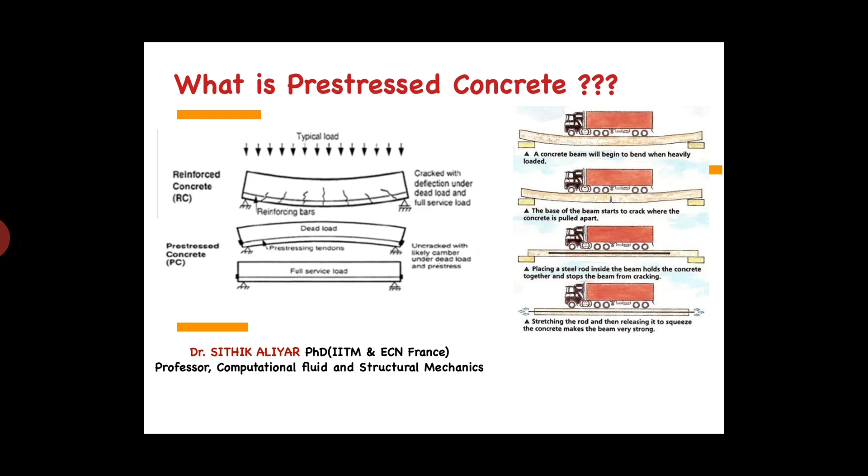When you apply further extra load, then only the beam will start bending, then tension will develop, then the crack will come. This is a new case, understood? It's not like the theory you have studied, totally it will change in pre-stress. You will understand more as you pass through and understand the figure, we will learn more in the coming slides.

This is another explanation. You see the first figure on the right side, like the same RCC beam. When you apply a load, the beam will bend and there will be a tension crack developed at the bottom. Same for the cantilever beam, I have shown for both, sagging and hogging, same story. When there is tension, the crack will develop when your load is exceeding.

But in pre-stress, the second figure, we are going to stress the beam from the side so that the beam will deflect in the upward direction, and when you apply the load, the beam will become straight. You see there is a deflection in the second figure, the beam is slightly bent. Up to how much you can make the beam bend, the deflection should not be greater than span by 300, it should be less than that. So this is the definition.

As I already told you, pre-stress concrete is the same concrete, but here we are applying initial compression. We will be compressing it from the side, so that before applying external load, the stress from external load is counteracted in the same way, then during the service load it will become a straight beam. If it is straight, then you apply a further extra load. If there is sudden reason, an earthquake or wind load, extra load coming, then it will bend.

So the capacity is double, triple, 4 times that of the RCC beam. This is one of the biggest advantages, but it is very costly. Steel you will get in common stores, but pre-stressing requires very high technical people to stress it up to 1000 MPa, 1500 MPa. It's very dangerous to do for every residential building. So it is common for bridges, decks, girders, everywhere.

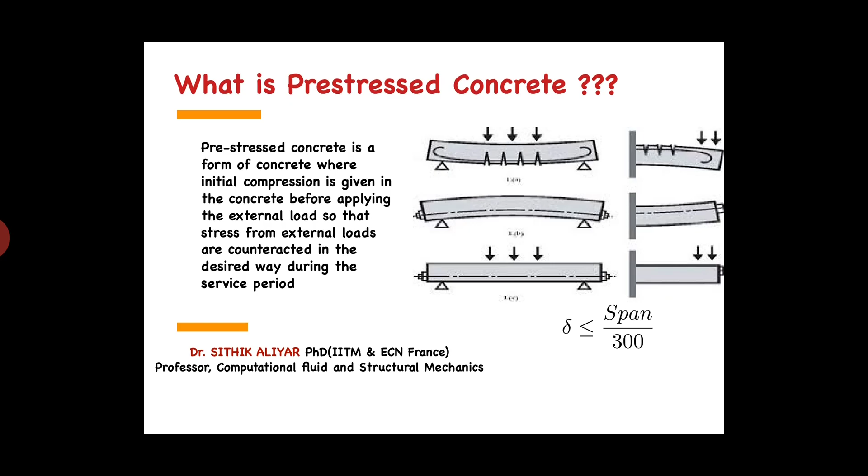So the pre-stressing, I have told the steel in that's the same story. The steel in RCC was playing a passive role. When the load is applied, then the role of steel comes, then if it is under-reinforced, the steel action will come. But here it is an active role, the steel is already under stress. So before even applying the load, the steel is already under stress. That is a big difference between RCC and pre-stress concrete. What are the materials we are using?

If we are pre-tensioning, I will tell you what is pre-tensioning, post-tensioning. It is M40, and we will generally use M30 and M40.

You see the steel MPa, they go up to 2300 MPa, mostly 1000 MPa, 1500 MPa. They will reach up to 2300 MPa. It's a very high number, right? Compared to 250 MPa for mild steel, it is 10 times. So you understood the load, right? 2000 MPa means it's a very big number, that much load it can take.

And you see the steel wire diameter. So far we have discussed 8 mm, 10 mm, 12 mm bars. Here the diameter of the steel wire will be 2 mm to 5 mm. Then a single wire will be formed as a strand or tendon, combining everything we will use. One wire can't take this much load, obviously, it will cut. So you need 10, 100 wires bundled together to form a tendon strand.

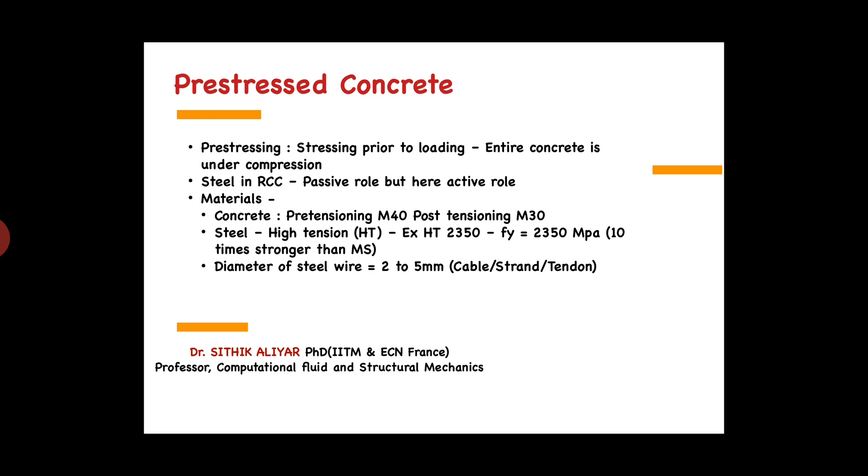Please Google these words so that you will see what is a pre-stressed cable, if you didn't understand.

So I told you there are two ways of making a pre-stressed concrete. One is pre-tensioning, another way is post-tensioning.

What is pre-tensioning? We will tension the steel before, okay, before itself we will tension. Tension means the same wire, same mild steel which is having 250 MPa, I will pull it up to a stress value of very high value. Like if I want 1000, I will stress up to 1000, 1200, so that with the loss I will at least get 1000.

So for pre-tensioning, you see the figure, I am pulling it, then I will cast the concrete, then I will leave it, then I will cut, so that the sudden release will make the concrete beam bend. This is the pre-tensioning method, and then the pre-stressed beam is formed.

Post-tensioning: everything is casted with the duct. There will be a duct and everything is casted. Duct is a pipe, small pipe, like a PVC pipe in your home, it will be a small duct. Then we will apply steel inside, then we will do the tensioning, post-tensioning. After the concrete is casted, we will do the tensioning, then you will have this. So these are the two different procedures, pre-tensioning and post-tensioning.

Pre-tensioning is mostly used in sleepers. Post-tensioning is used exactly everywhere else, for bridges, buildings, roads, etc., wherever you are using it. And for pre-tensioning we use M40, and for post-tensioning we use M30.

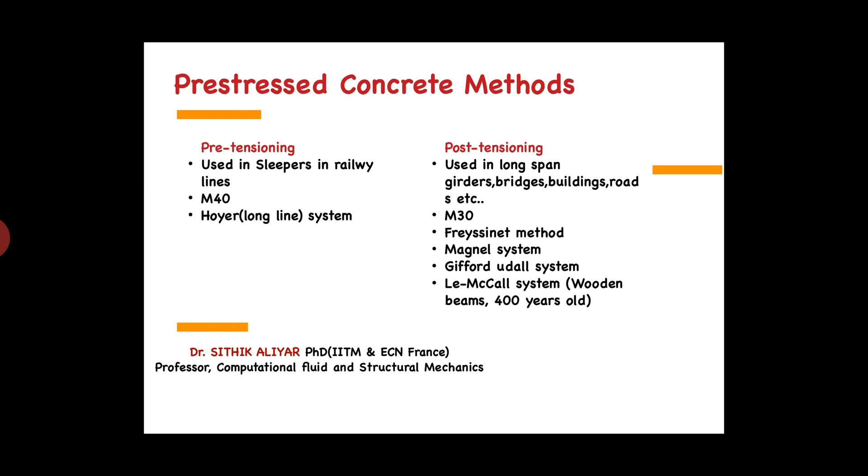So these are the two different methods. I hope by this part you know what is pre-stressed concrete, right? We are going to stress the steel wires up to 1500 MPa, and then we will suddenly release, so the beam will bend in an upward deflection. When the load is applied, it will become straight. That's it, I hope up to this you know.

When I am applying the load, you come to this figure, you see this figure on the left side. You see the third figure from the top. The last figure, cutting of the tendon, you see there is a compression acting after cutting, right? After cutting, you understood the logic: I casted it, I cut the bar, so the bar will act as a compression.

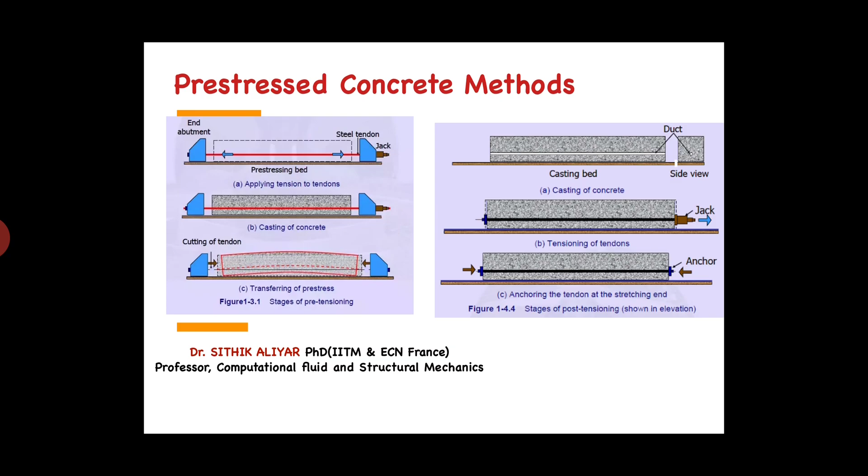Obviously, P into E will create a bending. It's like somebody, you are standing, somebody is putting high compressive force at your leg, at knee location, from the back side, obviously you will fall. Because why you are falling? You are rotating because there is a moment. Correct? P into E from your stability location.

But if somebody is pushing you with the same compressive force at your hip location, you just move two steps forward, so you are just sliding. But if somebody is pushing you at your knee location, you will obviously fall down by rotating. So that is the moment it will generate.

P into E is a moment divided by section modulus. I hope you know the formula. M by Z is nothing but bending stress. So P into E is creating compression at the bottom, tension at the top, from the neutral axis.

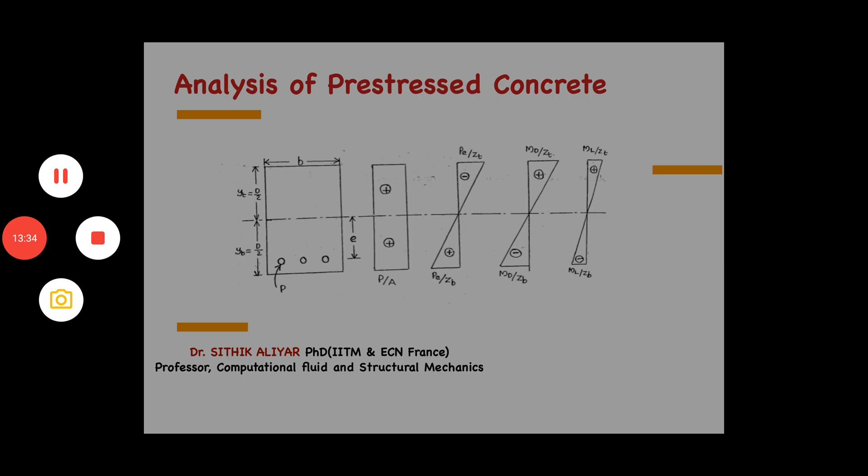Give me a second. So actually it is not Z T by B, it is Z T comma B. Sorry for the formula. See, everywhere it should be Z T comma B. The formula is wrong, it is not Z T by B, it's Z T comma B. Please listen, sorry for this. This is the first formula you are seeing in pre-stress, please note it down correctly. When writing the equation it came out wrong, I hope you understand, I did a mistake, it looked like Z T by B.

So when you are considering only pre-stress, the load because of compression and the bending stress developed because of that pre-stress, there are only two formulas, PE by Z. You can consider it simply as Z, there is no T comma B needed. So forget that, if it is a rectangle it is BD square by 6 anyhow.

So if it is because of the initial condition, only due to pre-stress, they are considering the first two figures. Only for transfer or initial conditions, the first three figures, M by Z, because of everything. Then after servicing, consider you made a pre-stressed beam and you want to know the capacity of the beam after 3 years. So you should include everything, right? Even live load, and then there will be losses, right?

So when you are pre-stressing, you are expecting 1000, but you won't get 1000 because of so many reasons - anchorage, shrinkage, so many reasons, you will lose the capacity. So I am putting some efficiency, eta, P by A, eta. I am putting these losses because of pre-stress into the formula: MD by Z, ML by Z. So these are the three cases.

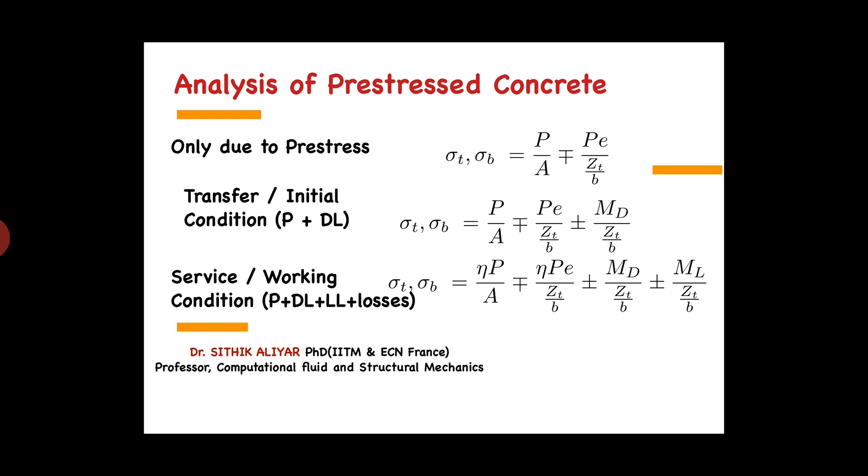Okay, so P is the initial stress, as I told you, eta is the efficiency factor, eta P is the effective pre-stress. I told you there are so many reasons for loss, we cannot expect the same value, so we have the eta value. This is another condition, the transfer condition. Transfer means at initial conditions, the top fiber will be under tension, because as I showed you in the figure, before applying load, that will be under tension.

At service condition, it will behave like a normal RCC beam, which has tension at the bottom, right? So that is the case. At transfer, at initial condition, the top fiber will be under compression and tension. If you understood these two points, you understood the total prestress concrete.

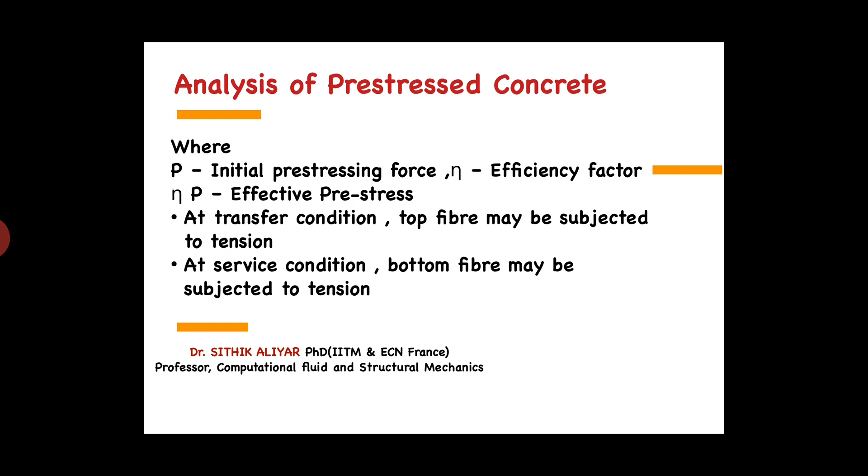So this is another story of prestress concrete. How to calculate the moment of resistance for prestress concrete is nothing but C into L, force into distance. Here the distance is because of two lines. There are two lines in prestress concrete you should know: one is the cable line, C line.

You have to draw a line of the starting point and ending point - that C line is the cable line. P line is the pressure acting line. Compressive force will be very high at the center because of the load applied. So how the parabolic force, or it won't be parabolic, it can be linear also - the force line. The compressive force line is that P line, pressure line, and C line is the cable line.

The distance between them will be considered as the lever arm distance, because what is lever arm distance? It is the distance between where C is acting to where T is acting - that is the lever arm distance, correct? So L will be equal to, here we are considering it as M by P, because M equal to load into distance, P into L. From there they have taken L equal to - lever arm distance will be equal to M by P.

So M is the bending moment acting, and P is how much prestressing force we are applying. In this example I've shown, it is a UDL load, so the bending moment will be WL square by 8. This is how the beam also will bend.

So you have to apply a pressure to counteract the WL square by 8. Correct? How much? How will you know how much prestress to be applied? So you have a beam, they are asking you to apply prestress. How much will you apply - 1800 or something? That number will be calculated based on considering it as a UDL load, and the beam will bend with WL square by 8. Then you will apply that load, then you will have a shape, right?

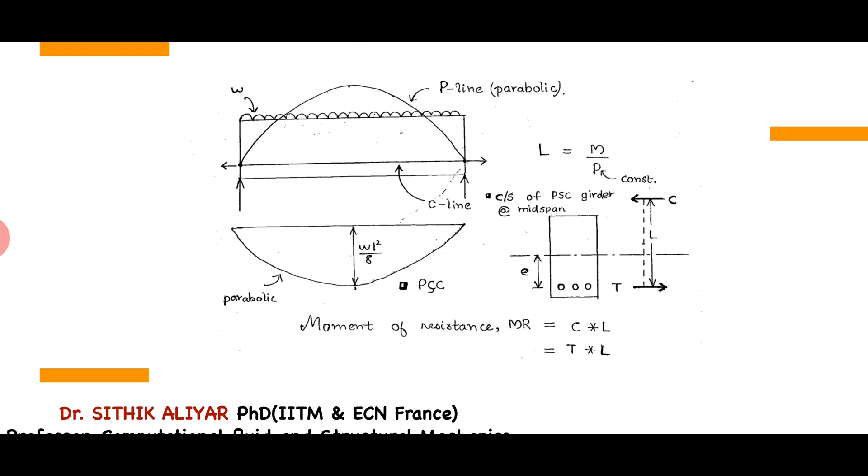I will show with an example. From this slide, you should understand that lever arm distance - they are calculating from force into distance. That concept, lever arm is nothing but M by P.

So the P will be a constant - remember that P is a prestressing force, that force you will apply will be constant. So one more thing I will show before that - an example of how it is being done, where you can keep your prestressing bars.

That prestressing bar should be inside the kern area - kern or kernel area or core area. This core area, you would know how to calculate for different sections. If it is a diamond shape, where it will be; for circular shape, where it will be. So for different shape cross sections, the kernel shape is given in strength of materials - I hope you should know that before.

So if you know that maximum distance, beyond that if you keep the bar, it will develop a tension. So far I hope you know the story - when I am applying prestressing, the total beam is under compression. When the load is applied, it will become normal.

So when you are keeping this prestressing bar beyond the kernel point or beyond the eccentricity, eccentricity will be more, that will develop tension. So there will be a limiting cable zone. If somebody is asking for a rectangular beam, this is a formula, d by 6 to d by 6 - below, inside that you should apply a bar, or else there will be tension in the beam.

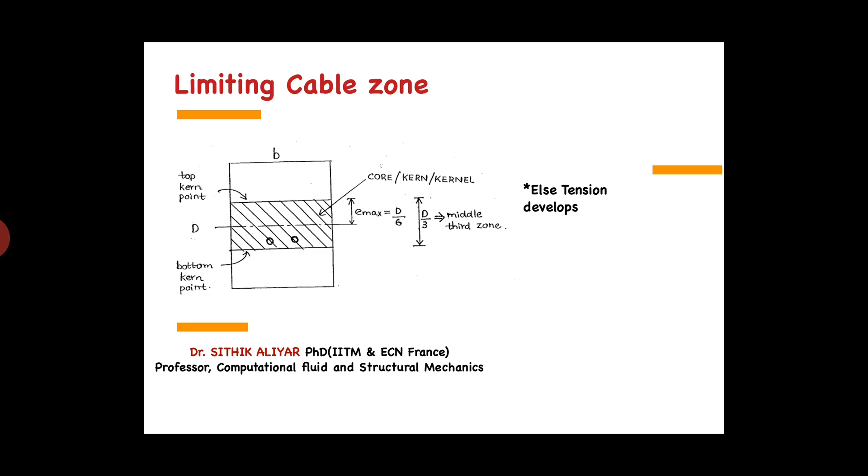There is no rule - you can apply and put reinforcement for the tension, not a problem. But this is the story: limiting cable zone you should put within the core or kernel, so as to have compression throughout the beam.

There are still some topics, but I will give you some examples to understand what we spoke for the last 5 minutes. A prestressed concrete girder, there are 10 meter span.

Okay, they are asking for a girder, meaning a beam, 10 meter span, 300 wide and 500 effective depth, with a straight cable. So the cable is straight, there is no different shape.

Actually we can have different shapes of cable inside the beam. It can be parabolic, linear, or triangular. Here they have given a straight cable with a pre-stressing force of 800 kilonewton, which is approximately 80 tons - a very big number. At 50 from the soffit of the beam, it is subject to a central point load of 500 kilonewton.

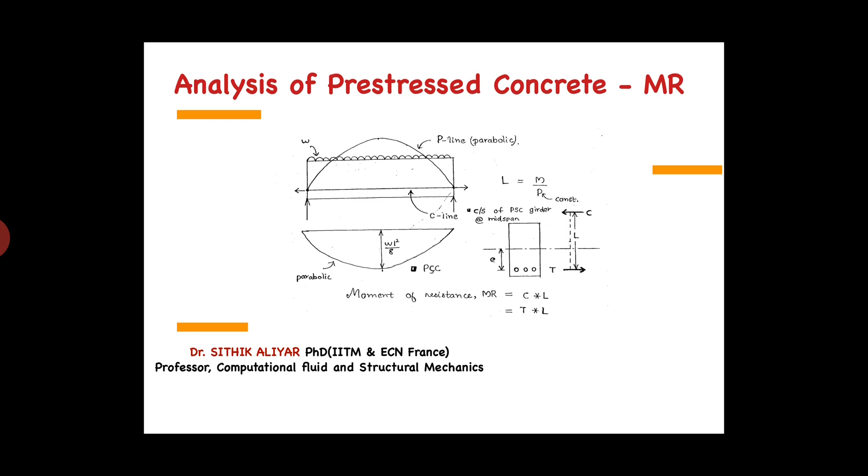They are asking you to locate the P line at the central span and also at the 1 by 4th of the span. That P line I showed you earlier, like this P line - you can see this figure. They are asking for the P line at center of the beam and also at the L by 4 distance of the beam. 1 by 4 of the span is length by 4.

So this is your answer. So they have given load as 500 kilonewton, length 10 meter, width 300, depth 500, pre-stressing force 800 kilonewton, and told you it is a simply supported beam with a point load. We know the bending moment formula, it is WL by 4, correct?

So this will never change, right? Whether RCC, PCC or steel structures, any type of beam, this will be structural analysis. The simply supported beam with point load at center will be WL by 4. So 500 into 10 by 4, which will give you the bending moment of 1250 kilonewton meter. You understood? The moment is very high, right?

If you are smart, you know that in a doubly reinforced section you would have studied to design a moment up to 200, 250, right? It will reach up to 270, 280 in flange beams. We never came across 1000 kilonewton meters - a very, very big number. So only for this we are going for pre-stressed.

So bending moment is 1250. At the center, bending moment is 1250. It is coming, we know the formula. We are going to shift - lever arm distance is nothing but we are going to locate M by P. We know M is 1250, P is 800, divide, you will get 1.56 meter.

So the P line will be at 1560, it is outside the beam. The compressive force is acting at very high value, that much heavy force is acting, 1560, at 1 by 4 of the span. I hope you remember the WL by 4 bending moment diagram for simply supported beam, it's a triangle. So at 1 by 4 of the span, it will be M by 2, right?

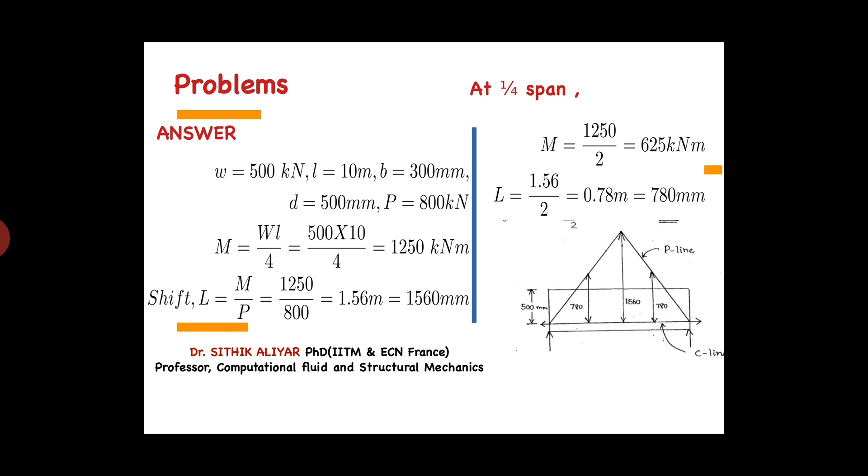By this problem, I hope it is clear. I am able to make sure what is C line and what is P line, how to determine the P line for a beam. If you didn't understand, go through this problem or solve it yourself with UDL load or other cases, so that you know how to draw a P line and C line. So that's this one, and I will tell you one more problem.

There is a pre-stressed concrete simply supported beam, again 6 meter span and rectangular cross section 300 to 600, unit weight of 24 kilonewton meter cube, and the resultant pre-stressing tendon has zero eccentricity at the ends and an eccentricity E at the midspan having a linear profile. Very simple. Under initial condition, the allowable stresses are 20 MPa in compression and 2 MPa in tension.

See, at initial condition, they have given these values. At initial condition means, I told you 3 cases - only pre-stress, then compression and bending because of pre-stress. At initial condition, you should consider compressive stress, bending because of pre-stress, and then you should consider the dead load - that's the second case. So then they are asking how much pre-stressing force you should apply, and the eccentricity at the midspan they are asking. So you see, step 1, you should calculate the section modulus.

So here it is a rectangle, Zt, Zb, no issue, it is like BD square by 6. I hope you know section modulus, it is I by Y, I is BD cube by 12 divided by Y is B by 2, D by 2, so it is BD square by 6, okay, 300 into 600 square by 6.

And they have given, you should calculate the weight, they have given the density, you should calculate the dead load, right? I hope you know you should calculate dead load, then only you will get the dead load bending moment, MD, to solve the problem. So dead load is density into area, multiply, you will get per meter, 4.32 kilonewton per meter.

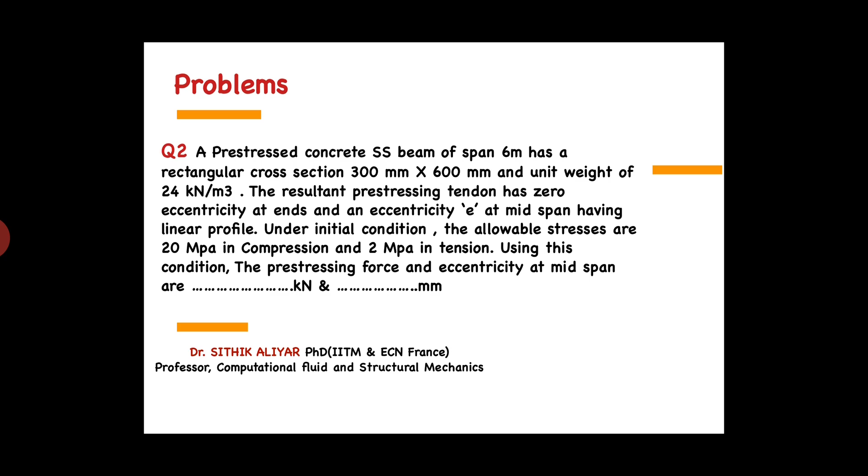So they have given at initial condition it was in tension, so minus 2 MPa. You can see they have given at initial condition 2 MPa is in tension, 20 MPa in compression. So minus 2 MPa for sigma t and 20 MPa for sigma b at bottom.

So you just, if you see, it is algebra equation, right? You just cancel minus P by Z plus P by Z, cancelling each other, MD by Z minus MD by Z, you can cancel each other. So you will get 2P by A equal to 18. So you will get the P value, pre-stressing force.

So you have to apply a pre-stressing force of 1620 kilonewton. Okay. Now you put this in the 20 formula.

20 equal to, because you know P, you know A, you know Z, you know MD, everything. Then you can calculate the eccentricity, where you should put the bars. Solving this will give you the eccentricity of 135 mm.

Okay, see, with this problem you can solve, you can pause and solve the problem. I hope after solving the problem it is clear how to calculate the pre-stressing force. If they have given live load, one more equation will come, that's it. Okay, so this is the same, they will give, change the numbers, change this one. This is how you should calculate how much pre-stressing force to be applied and where you should keep your bars.

Okay, eccentricity. So this is very important. Okay, please try to solve. And I expect the problems, they can ask more problems only related to these stresses. Okay, P by A minus P by Z, only the same story. It will be very easy. You try to solve in textbooks if you have more and more problems, but they will only change the numbers here.

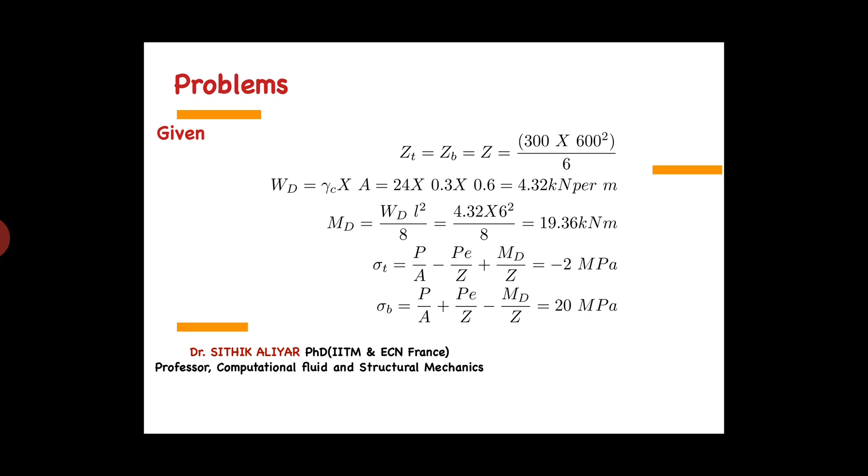The numbers, or they will give you live load also in this formula. Okay, so it's very simple. Okay, it's we'll move on.

There is one more concept here, final concept before we are moving to losses, load balancing concept. So this will be very simple. Okay, so by using, we should put a suitable cable profile inside the beam, so that the external live load can be easily directly balanced.

Okay, so if you put a bar, you see the first figure, left side top figure, I am putting a bar in a triangle way with some eccentricity at the center. If I put the bar like this, you resolve at the end, P will be resolved to P sin theta, P cos theta, P sin theta, P cos theta, right?

So if you see, the W applied from the top will be taken care by 2P sin theta, correct? The shear forces whichever is coming will be taken care by P cos theta, correct? P cos theta is a horizontal force, so that will be taken care by P cos theta. Then if you equate also, you will get the same formula. That is the load balancing concept.

The W live load coming from outside will be taken care by the P sin theta terms. Or one more way of explaining this is, if you see a simply supported beam with a point load at the center, you draw the bending moment diagram.

In the same bending moment diagram way, we will put the cable profile inside. If you put the cable figure inside, you will know how to calculate the P value. The bending moment will be calculated as P into E.

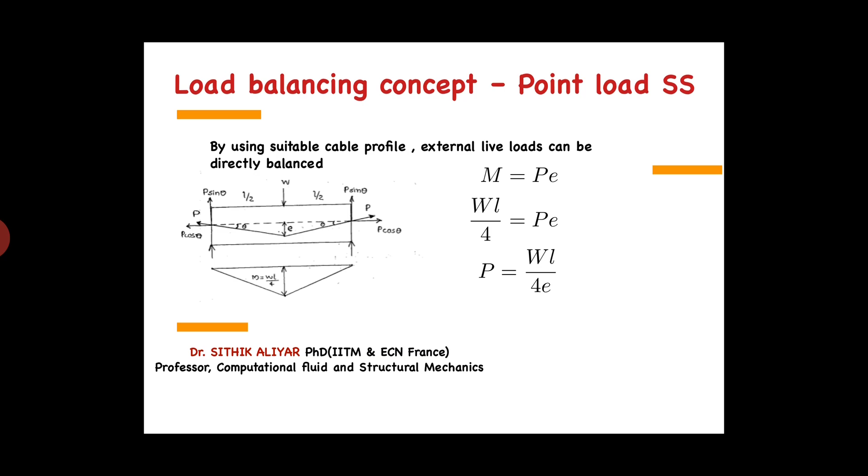So how much pre-stress to be applied, you can use this load balancing concept to determine, and solve for different beam problems. If somebody asks you in 1 mark, you can use this concept to tell how much pre-stress to be applied.

Coming to the last topic in pre-stressed concrete, there are two types of losses that can happen. One is immediate loss. After applying pre-stress, immediately there can be elastic deformation. In pre-tensioning, I am pulling the bar, casting the concrete, and then suddenly releasing the bar. The bar will hit the concrete surface, so there will be elastic shortening of the concrete. That is immediate loss. There is also friction loss, and anchorage slip can also happen.

I am expecting 1000, I may get only 970, 980. So these three are immediate losses.

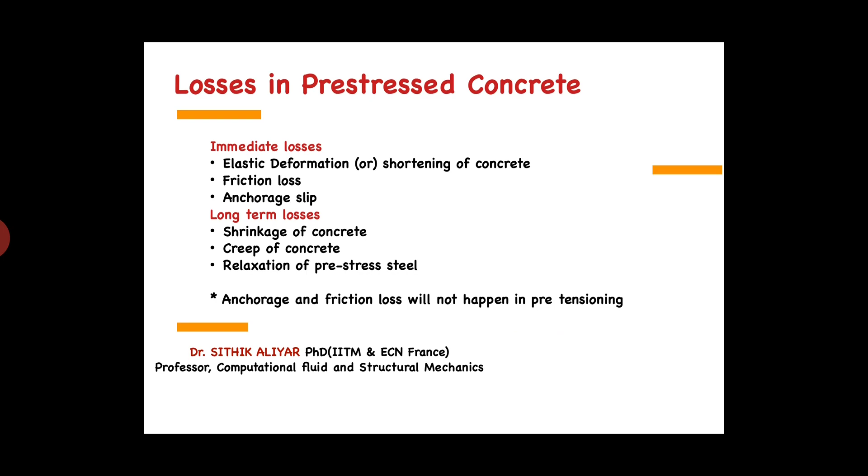Long term losses are like shrinkage - concrete will shrink over duration. And creep, we have discussed so much about creep in limit state of serviceability, and there will be relaxation of the pre-stress steel. These are the losses you can expect. Anchorage and friction loss will not happen in pre-tensioning. If you are doing pre-tensioning, there won't be any anchorage or friction losses.

So what are the formulas if you are using elastic deformation? What do you mean by losses? They will ask problems related to losses, meaning I am expecting 1000 MPa but I got only 970 MPa.

The first formula to calculate loss due to elastic deformation is n into m into fc. N means number of wires, leave that for now. M is the modular ratio, Es by Ec. If there are so many wires in the tendons, you should use this formula, but we will never use it that way - if you face it somewhere you can use these formulas, but it is very simple.

It is nothing but m into fc. Mostly they will give us a single wire, meaning in problems they will give you a single strand of wires. So m into fc is the formula to calculate how much loss is due to elastic deformation. M means modular ratio, steel Young's modulus divided by concrete Young's modulus. Concrete Young's modulus is 5000 root of fck.

Fc is the stress in concrete at the level of pre-stressing. At the level of pre-stressing, what will be the stresses? We have seen P by A plus or minus PE by Z - same formula we will use, but at the level of pre-stressing the eccentricity will be 0, so most cases we will have P by A. So this will be the formula, n into m into fc. Most of the cases they are giving us a single wire, so in example problems n will be 1.

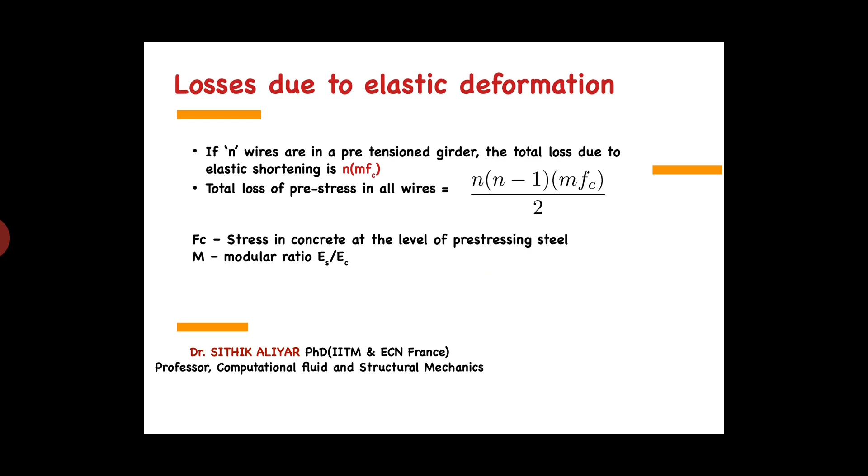Loss due to shrinkage of concrete - I will show an example for elastic deformation, then we will come back.

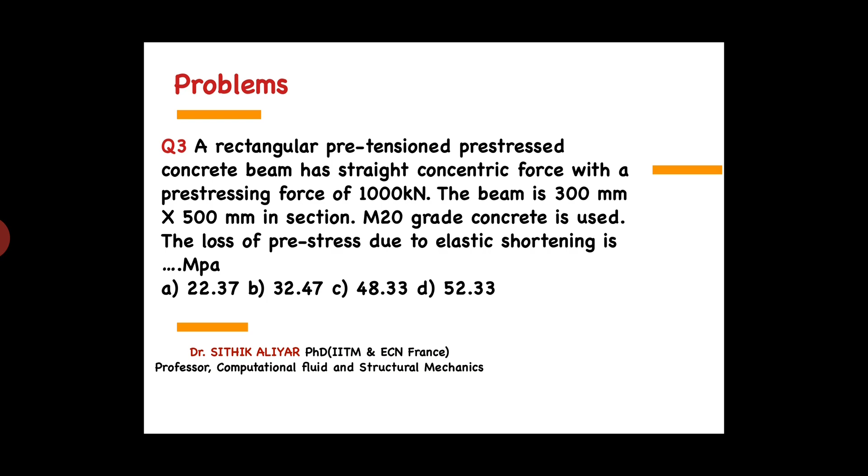They have given an option, you can pass and solve. Anyhow, this will be your two-step answer. So this is concentric, M is modular ratio, steel Young's modulus divided by concrete Young's modulus. Steel Young's modulus is 2 into 10 power 5. Concrete is 5000 root of FCK, so approximately 7.8. Stress in concrete at the pre-stressing location, so that the eccentricity, the second term should be 0.

The first term is P by A. P by A is 1000. They have given pre-stressing force 1000 into 10 power 3. Area 300 into 500. You solve, you will get 6.67 MPa.

So elastic shortening loss, I told you M into FC. So multiply both, you will lose 52 MPa. You can calculate this beforehand. You will lose up to 52 MPa because of elastic shortening. I hope I made you clear.

So we will go back to second loss. Second loss is shrinkage. Shrinkage is very simple. Stress is nothing but Young's modulus into strain, by Hooke's law. So strain is epsilon SC, change in length by original length, Young's modulus of steel.

They have given a constant value for estimating the strain because of shrinkage. For pre-tension case, it is a constant 0.0003, and for post-tension case, they have given a formula 0.0002 divided by log 10 of t plus 2. T is the number of days. Because shrinkage will happen, it's a permanent loss. It can happen after 90 days, 100 days, you can calculate even after 365 days, after 1 year also. So the T you should put in days.

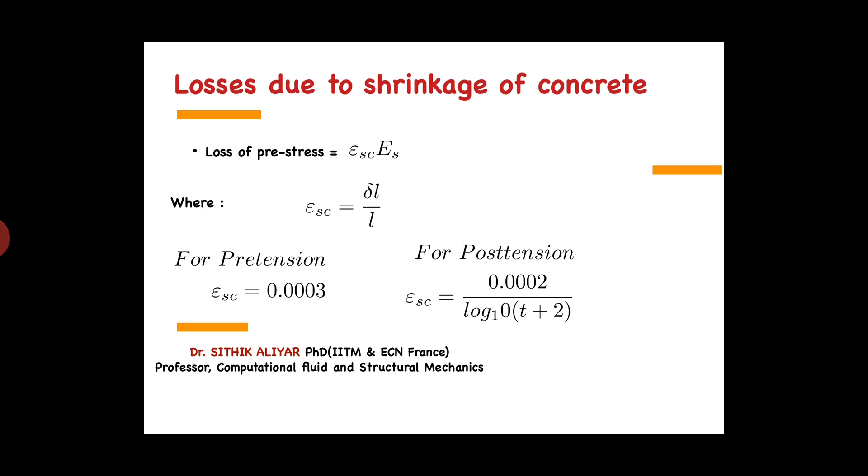So it's a very simple formula, like a strength of materials problem. Stress is equal to strain into Young's modulus, directly proportional. You substitute the epsilon SC value from here, multiply by steel's Young's modulus, most of the cases 2 into 10 power 5 MPa, you will get the answer. I will have one more example for that, I will show that problem.

Next thing is creep. Creep, I have mentioned in so many cases before, what is creep, and I have explained clearly. So two things happen: because of creep of concrete, concrete will lose some stress, and steel also will lose some stress. It is a direct formula, same M into FC what we have seen initially for elastic shortening, but we will multiply with the creep coefficient. I hope you know what is creep coefficient, for 7 days it's 2.2.

I have given one table for 1 year, 1.1. I have given this table in the limit state of serviceability chapter. Same table, you take the creep coefficient value, multiply here, and do the same thing you did for elastic shortening, M into FC. You will know how much loss of pre-stress happened because of creep in concrete.

This formula. So in steel, it is called relaxation of pre-stress. We will say loss will be approximately 2% to 8%.

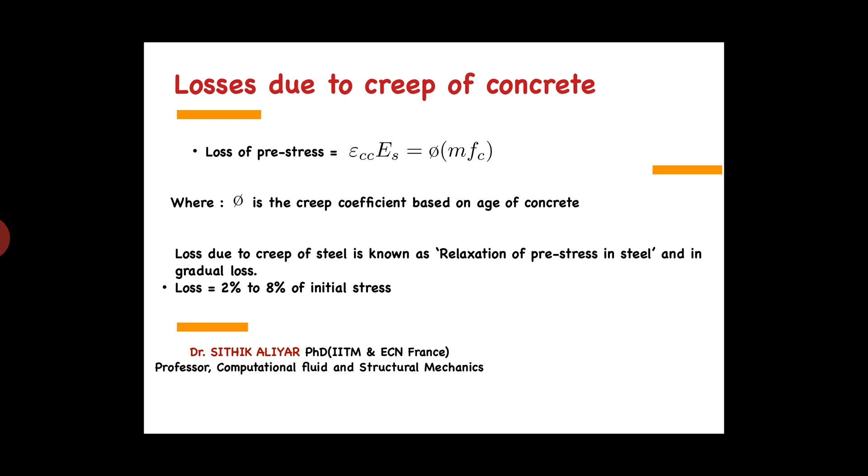Next, this is one of the losses which you will see only in post tension, because of friction loss. You will not have any friction loss in pre-tension, because it is already tensioned. So this immediate loss is also a loss of pre-stress. The formula is nothing but P naught into mu into alpha plus kx. Mu is the coefficient of friction, alpha is the cumulative angle.

Cumulative means you will sum the angle. If it is theta theta, it will be 2 theta, and you should put it as a radian. K is the wobbling constant, and most of the time the wobbling constant will be given in the question. X is the location at which you want to find the value, which you can see in the figure. For loss of pre-stress, if it is a straight cable, alpha will be 0, since there won't be any bending at all. So that term will drop out, and only p naught into k into x, the wobbling coefficient into the location you are finding, remains.

I don't have an example now, you can find one in your literature. This is the extreme formula they can ask, and you can shorten it for straight cables.

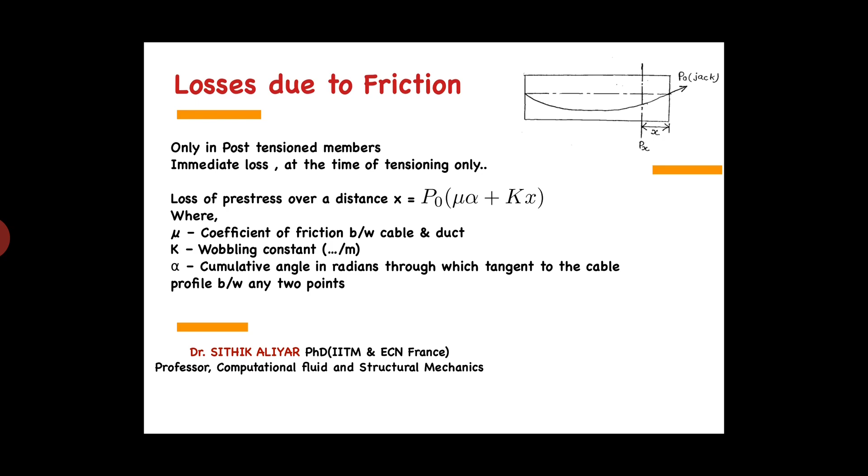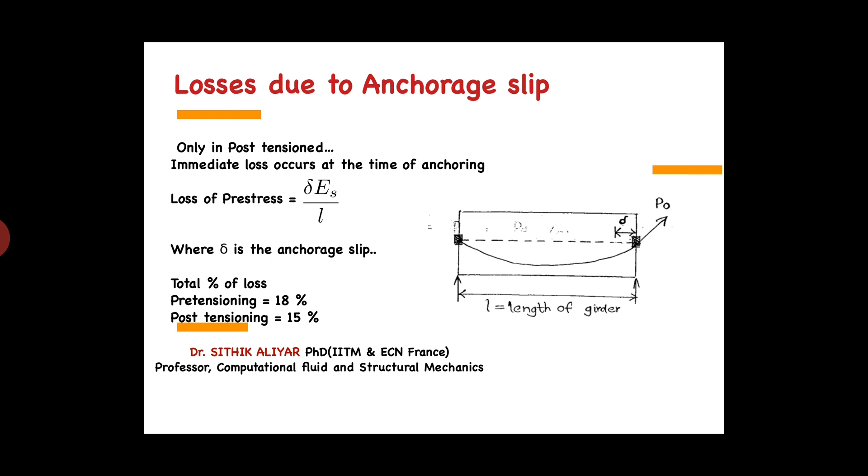Overall, as we have seen, the maximum you can expect in pre-tensioning is elastic shortening loss of 3%. For creep it's 6%, shrinkage 7%, and creep in steel, which I told you is relaxation, is 2%. So overall, if you do pre-tensioning, you will lose 18% of your total stress. That means if you are expecting 1000 MPa, you will lose 180 MPa maximum because of all these losses.

In the post-tensioning case, you will lose only 15%: 1% in elastic shortening, 5% in creep. These match the values they ask in exams based on this table. You should remember that the very high loss is expected because of shrinkage, which is a permanent loss, and the second highest is creep - both permanent losses. Elastic shortening, at 3 or 1%, is very minimal.

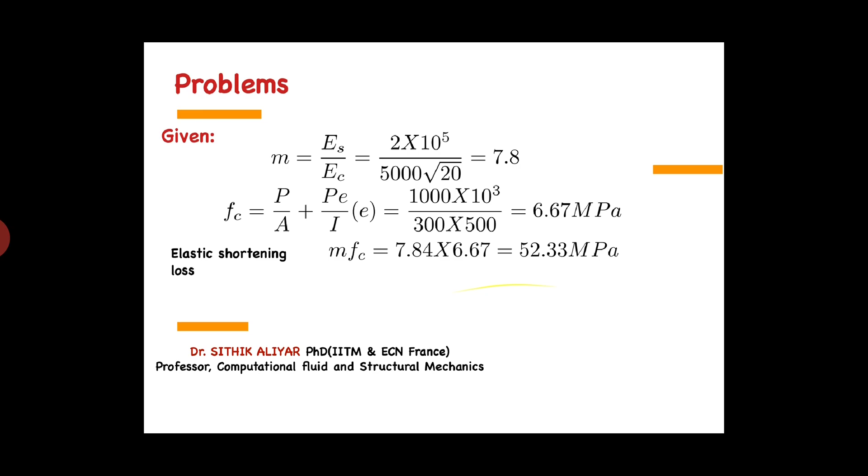I have one more problem, and with that we'll close the class. This is a concrete beam problem for understanding anchorage slip.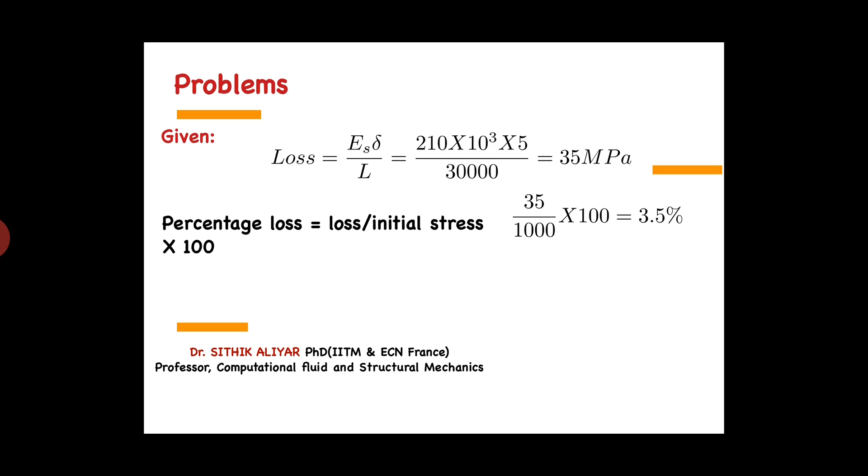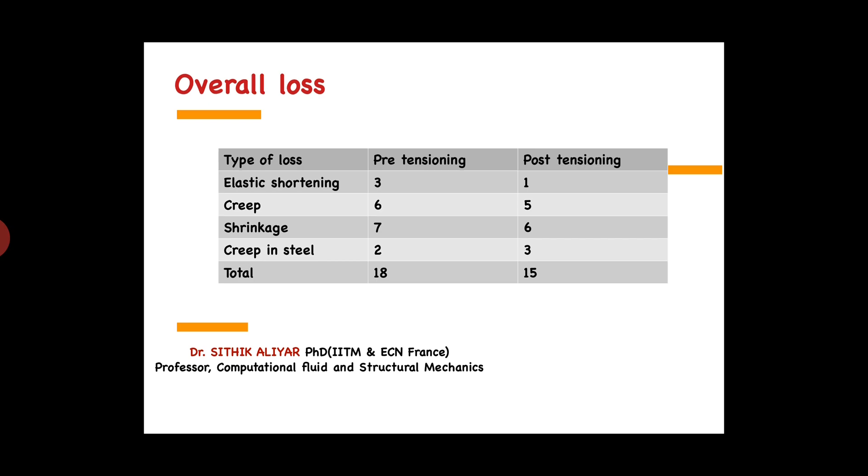You see, for this problem the anchorage slip loss is 3.5%. I hope I made the anchorage slip concept clear. So with this we'll close the class. If you want more problems, you can try them in your textbooks, and if you have any doubt please ask me.

For this chapter, try to concentrate on the losses topic for 1 mark questions. Try to solve 4, 5, or 10 problems in losses, and also try to solve 1 or 2 problems on how to calculate the p by s stress values, how much stress is acting at the bottom and top. The load balancing concept you will study clearly in your structural analysis classes, based on equilibrium conditions. So concentrate on losses for 1 marks with more and more problems - it will be direct formula substitution. You have only 5 or 6 formulas, substitute directly, and you will get the answer. Also try to concentrate on stress values.